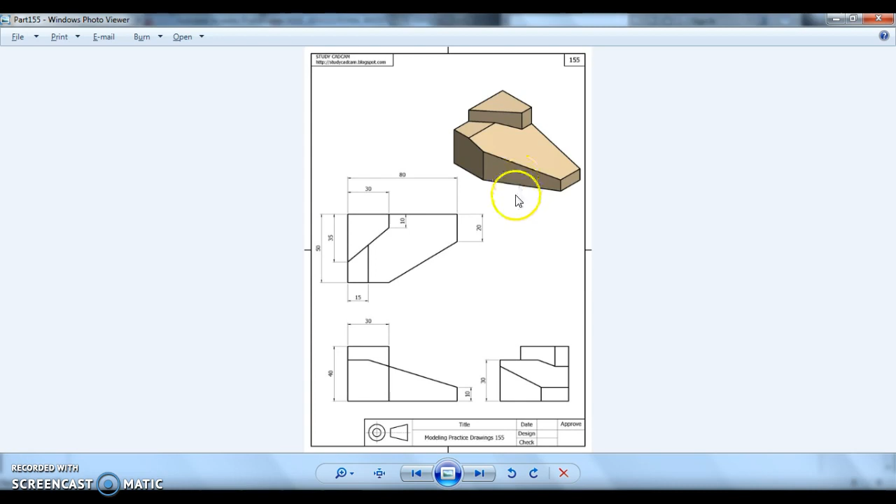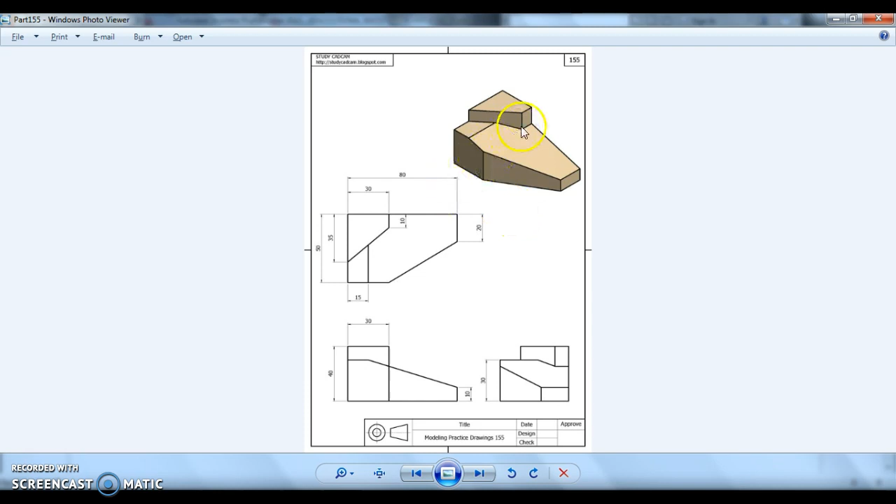Many ways to tackle this beast. What I'm seeing is this main base feature here in the front view. Looks like I can extrude that inward through a depth of 50, so I'm going to push that back. Then come on the top view and cut it right here, so we can cut this little triangle out. And then come back in the end and extrude this feature right on through with this shape.

So let's see, 1, 2, 3 steps, 3 features. Should be easy enough. Looking at the dimensions, we're in MMGS, so always remember to set your units first. Alright, let's get this thing going.

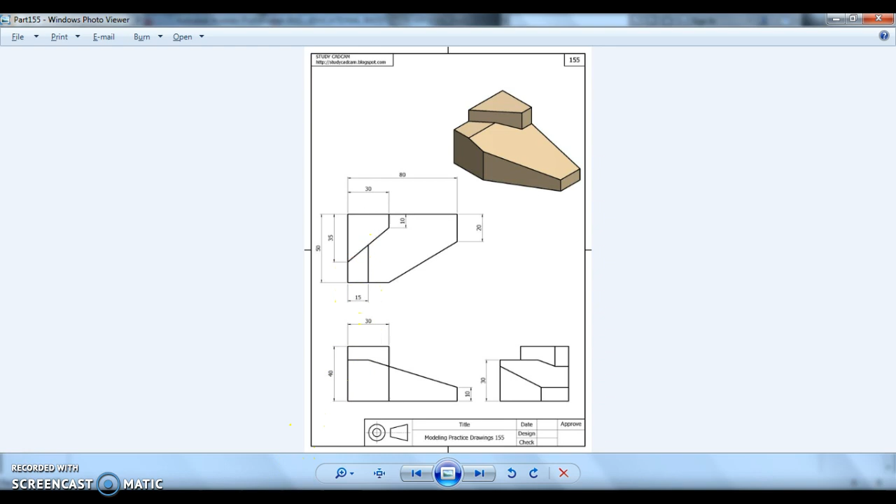So let's open up our CAD software using Inventor. You have all this crazy stuff if you have templates loaded in previous projects. If you have nothing, you probably just have an icon up here. So go to the icon, drop it down, new part today. Just starting with a basic part.

Simple sketching, one extrusion, 2 extrusions and a cut. So here we are. Alright, let's see if we can get this thing going here. I'm going to start with a sketch. No, start with our tools. That's right, always start with the tools.

Document settings and units. Wherever those units may be, I don't care what software you're using, find them and change them. Right now we're just going to change these to millimeters. In a true MMGS system, we would also change our mass to grams, but we're good for now.

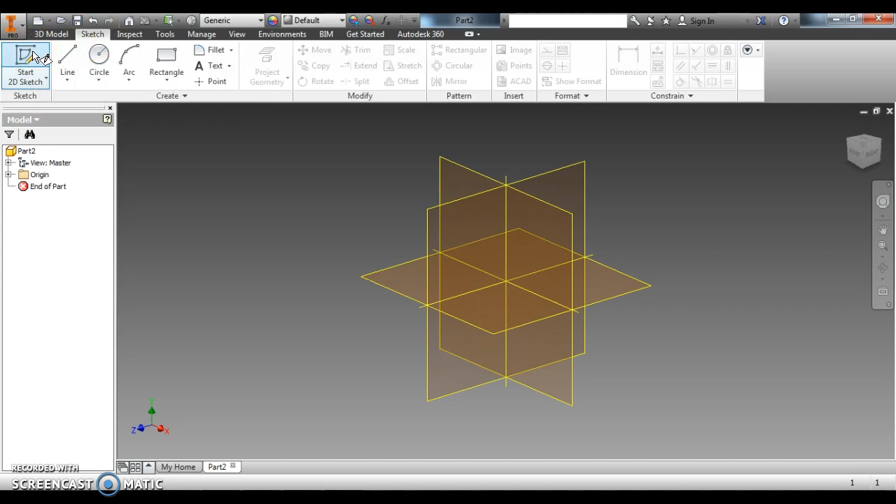Alright, sketch. 2D sketch. Let's just stay with our reference image here, and we'll start in that front plane.

Going back to our picture, you see we have this shape here. So there's a 10 there, and it's this 30. Beware, you see a 40 here in the front, but really that height is the 30.

So it's the 30, the 10, and then the length you find all the way up here in the top view, the 80. So we're going to go 30, 15, 10, 80. Alright, let's knock it out.

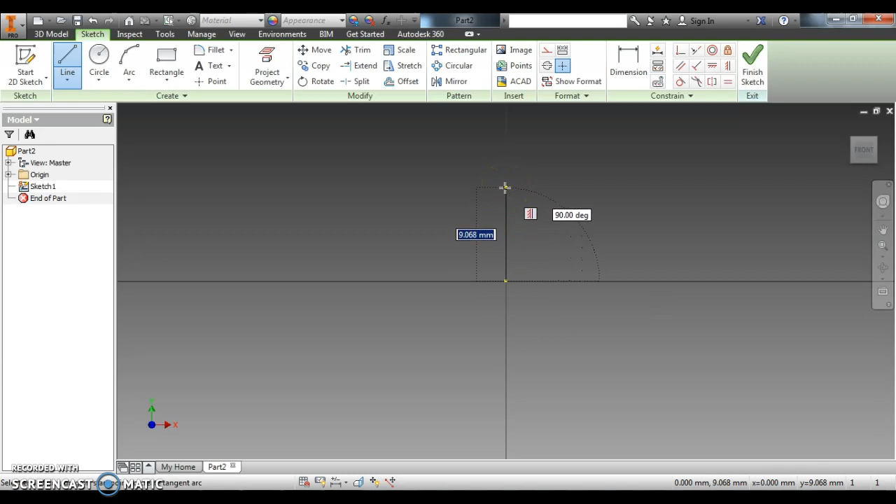Line. We'll start at the origin. Let's do our first little 30 here. We can type it in. Direct input, 30, enter. Use your mouse wheel to scroll on out.

I'm rolling it in. Use your mouse wheel. Push that bad boy down to pan. So get good at navigating. Come on, alright, let's rock this thing out.

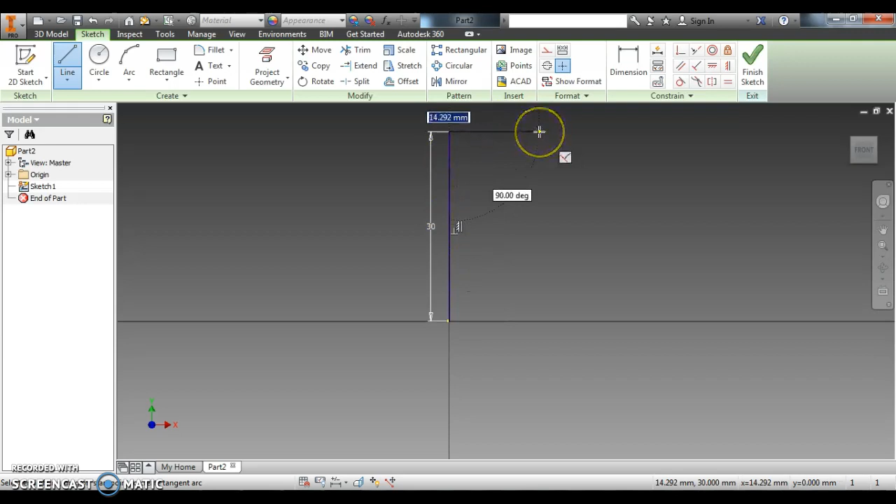That was 15. This came down at some type of angle. Make sure it does not hit the midpoint. We do not want that relationship right there. No, so bring it down.

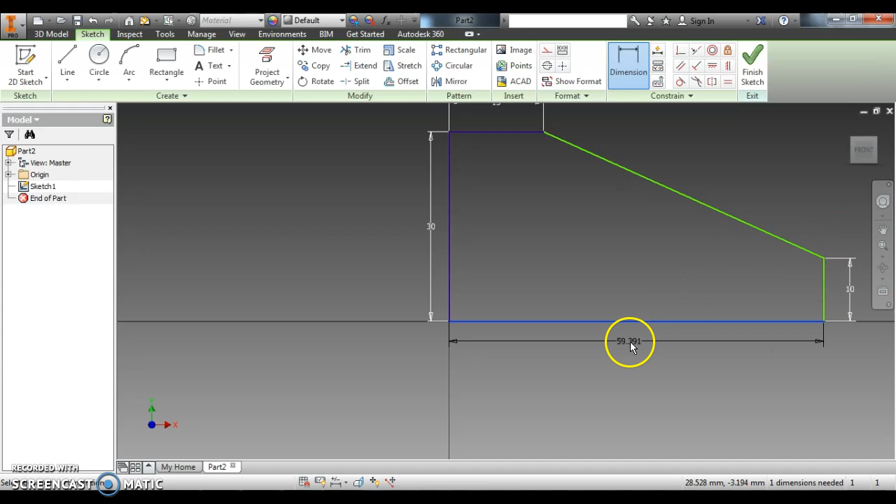Alright, straight, keep it vertical, and close it off. When you want that vertical, keep it vertical. When you want the parallel, keep it parallel. Make it do what you want it to do, man. It's the great thing about relationships and constraints. You can really lock in that design with the intent.

However, if you set up the wrong intent, it can make a mess. So there's our base. Alright, go back to your reference image. Get extruded to a depth of 50. Alright.

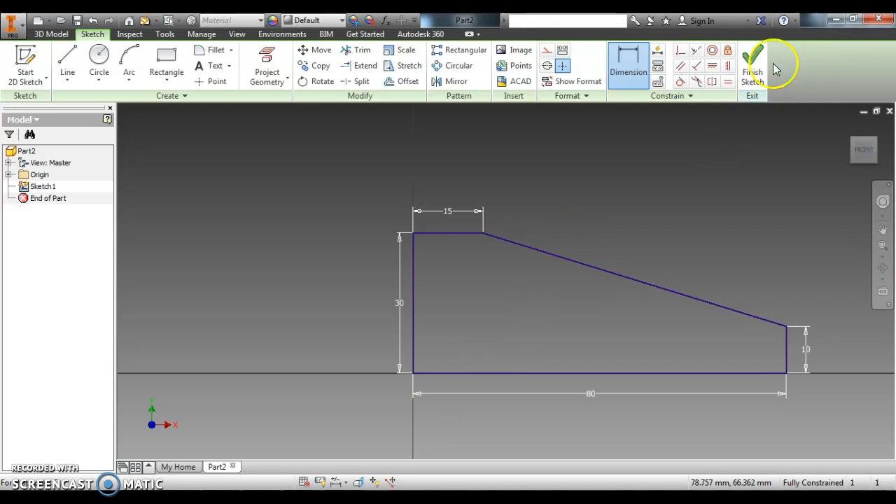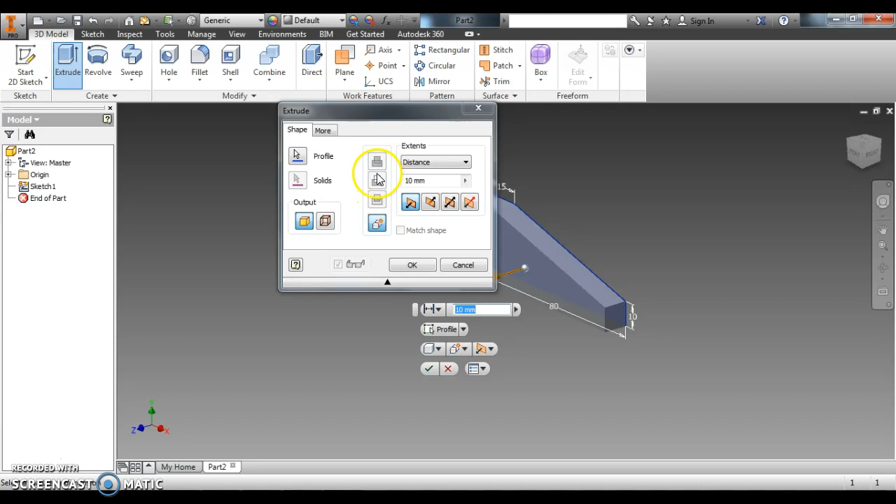So, finish sketch, and let's go to 3D model. Extrude. Right now, since we have nothing created, the only thing we can do is new solid. In the future, we can add, subtract, combine.

Well, type in 50 for our distance right here. This is which direction you want to go. You can go both ways. Yeah, symmetry is nice, get in the habit of that. That's great for the future. Symmetry, we like symmetry. Alright.

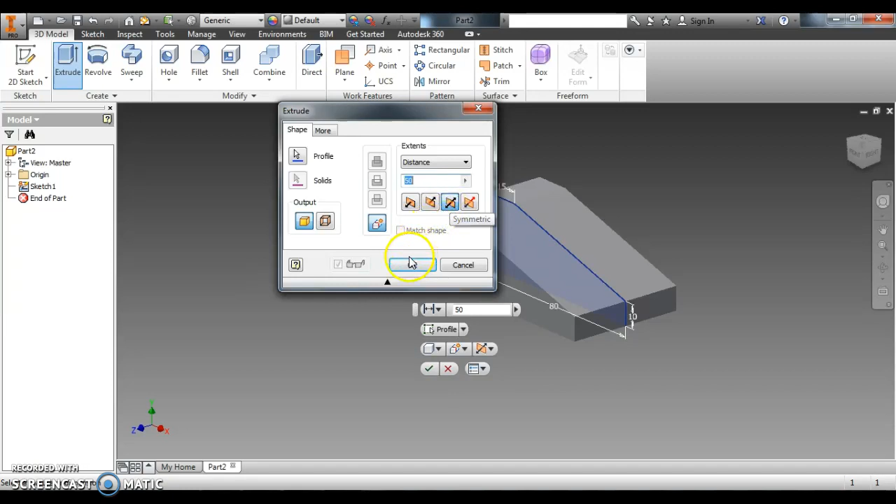Okay, there's your first part, or your base feature. Extrusion 1. Alright, let's cut that triangle out the top. So I'm going to go to this plane right here.

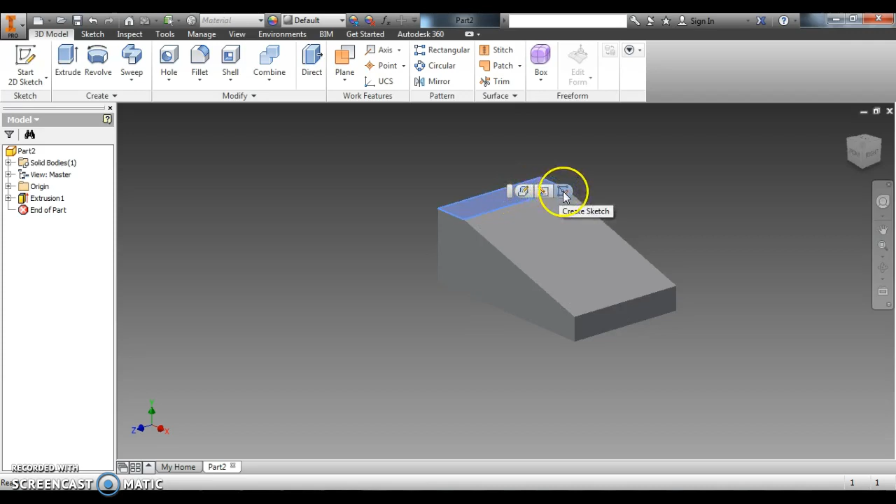And I am going to create a sketch. Or you can hop over here.

Alright, this drops us on a plane right there with that top surface. So we're going to sketch our triangle and cut it out.

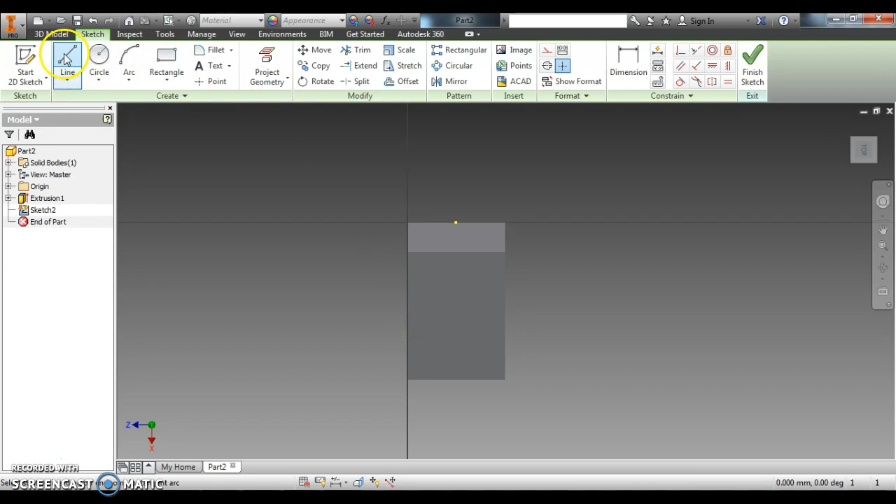So there we go. What we don't want is that. No, bring it off. We do not want to lock onto that midpoint. Let's get it here. Let's get it here. That is not what we want.

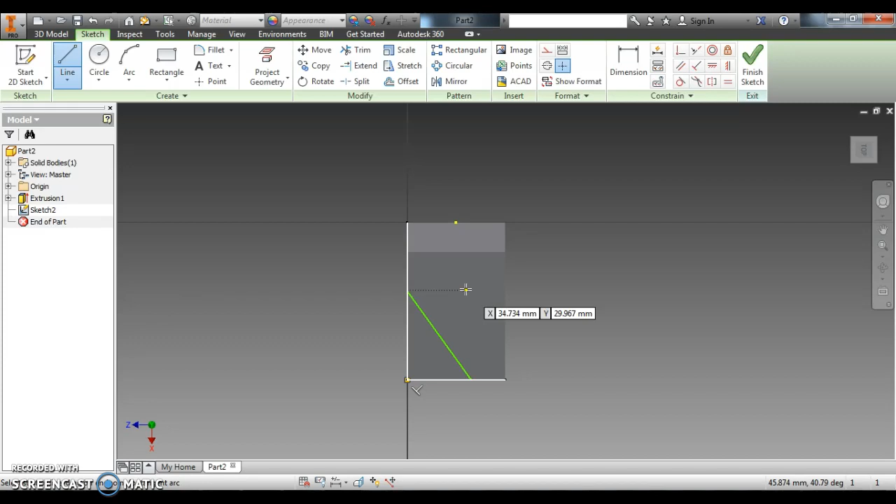It locks you on there with a relationship, and if that's the intent, okay. But if not, don't put it there, because then you're going to have to come back and delete it, and it causes all types of mess later.

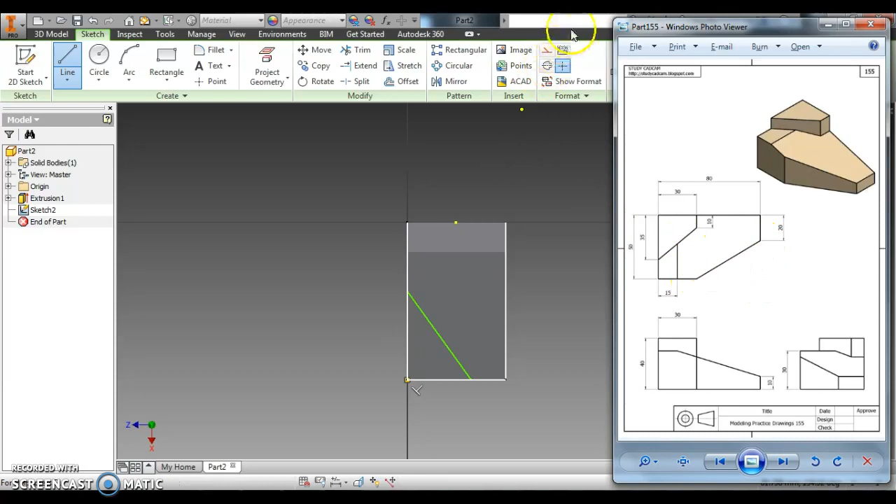Alright, so go back into our CAD. And we could mark the length, we could do a little subtraction, but let's just get in the habit of inputting the dimensions given.

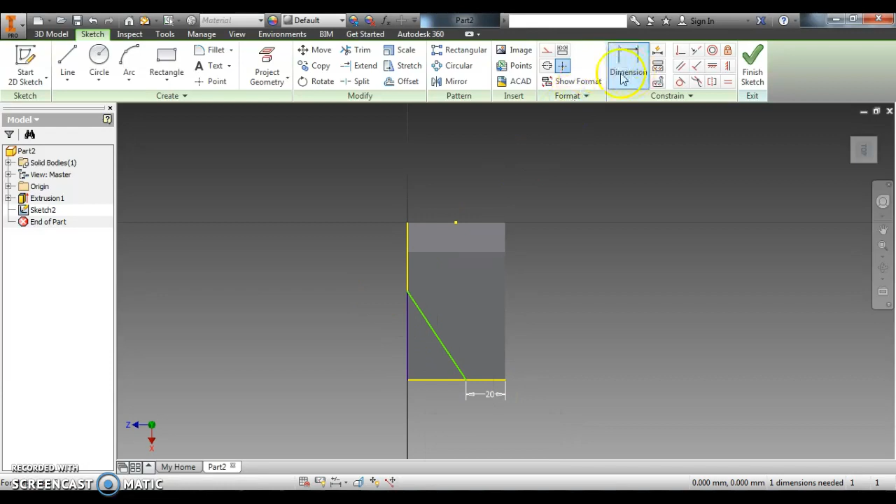They gave us 20, and I'm just using our dimension tool here from point to point. 30. Real simple tool to use. So you just click your dimension tool. You can click a line and place a dimension. You can click an edge. You can click circles, whatever it may be.

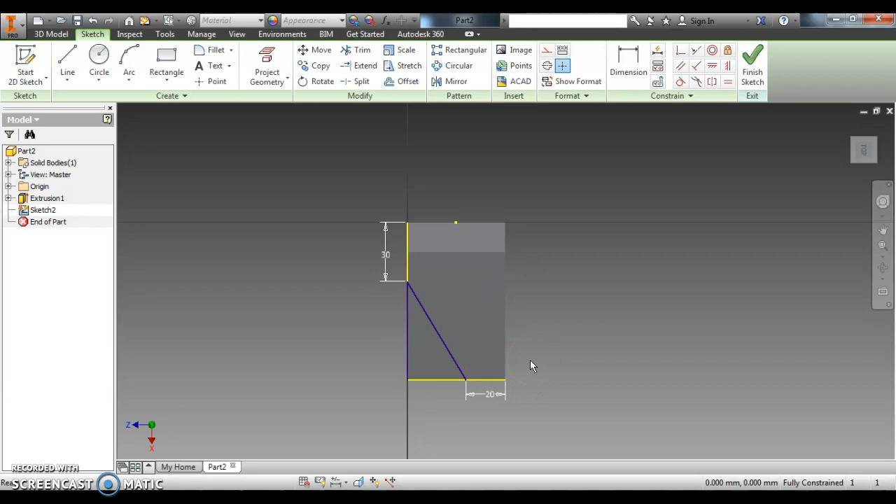Alright, I think this sketch is good. Hit finish sketch. There it is up there. So we're going to use, I'm not sure why it has a little extra piece there, but let's go to extrude.

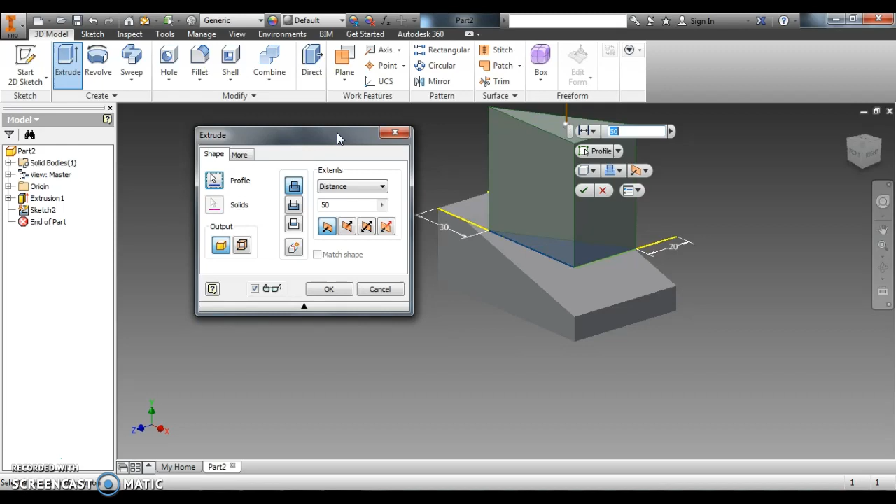You'll see that it's adding material. We want to subtract material. And there it goes, cutting right through it. Our piece is only 40 high, so we know that this piece of 50 is going right through it. You're going to see it there.

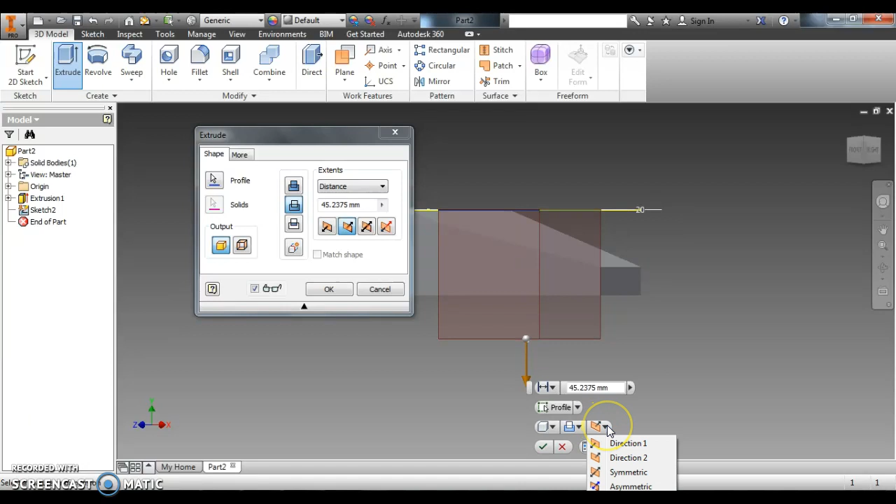You can also use these handles if you like and drag things up. In the future, you can set relationships to make it always go through all. Oh, where's it at? I don't know. Let's not get too wild right now. There we go. Alright, there's that cut.

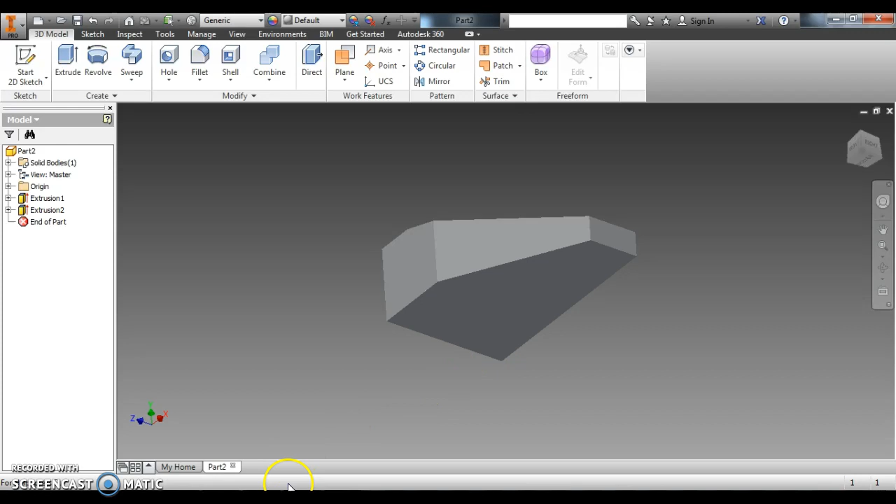Let's sketch that last little shape and extrude it on up. So I'm going to sketch it on the bottom. Why? I don't know, that's just because that's the way my mind works. I see the height coming up from the bottom there. So I'll bring it all the way on up through. That way I know it gets through all of this sloped area here.

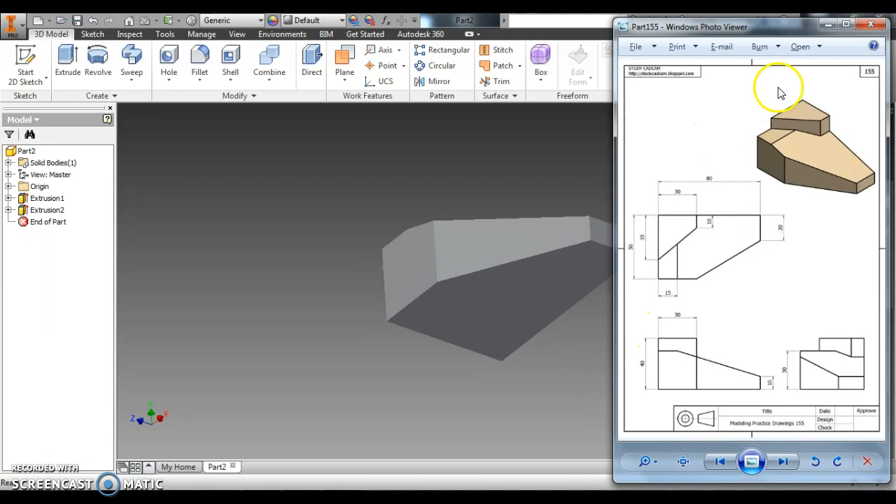And I guess I could come up to a plane at 50 or go both ways, but that's just too much. Let's just get down here and sketch. And what I saw was the shape from the top. That's what I was seeing. There we go.

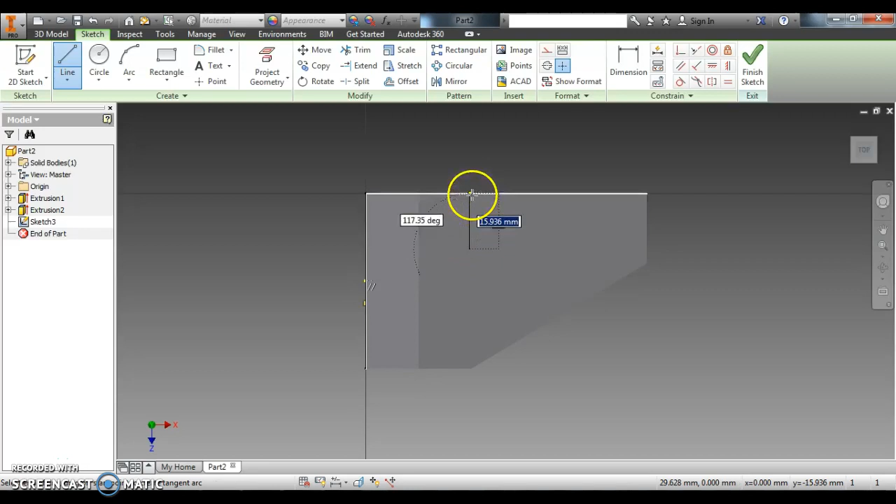Let's do this. Look at that, see? So we just come in. Alright, and we're on this top surface here. So we're looking through the top. Oh, and we're on the bottom. That's what we're on, we're on the bottom. So 1 line, 2 lines, 3 lines. There it is, boom, right there.

And the dimensions that we have are 35, 30, and 10. So there's that 35 in there. Oop, see, now I can't see my lines. Dimension, there's a 35, come on. Dimension, there's a, come on. Dimension. There's a 35 in there. There's a 10 in there. And there was a 30.

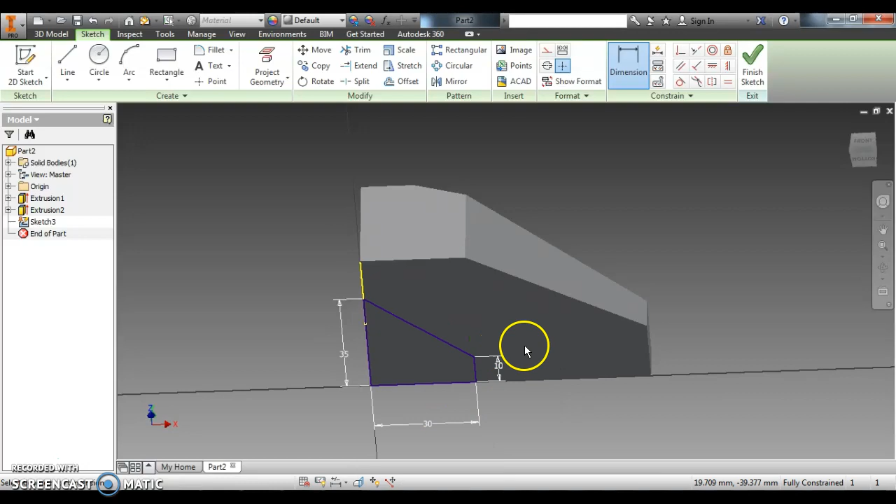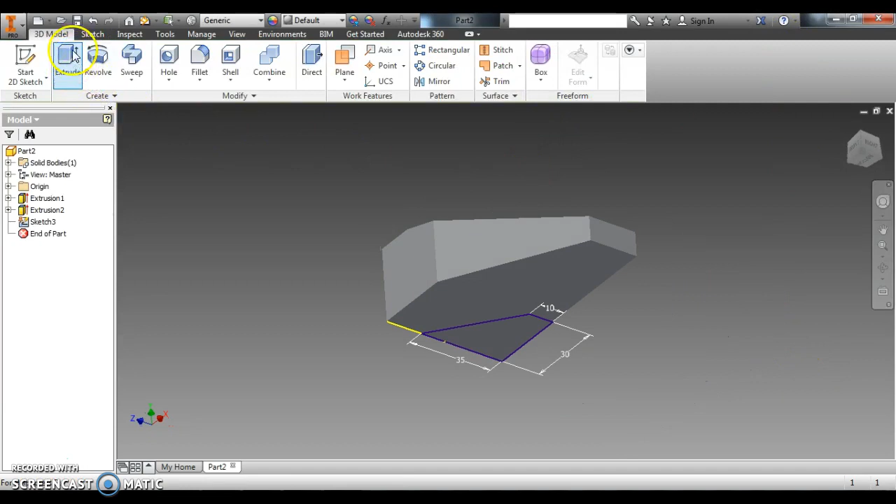If I spin this bad boy back around, 35, 30, 10, and it comes up to 40. So there it is. Let's finish this sketch. Let's extrude her on up to 40.

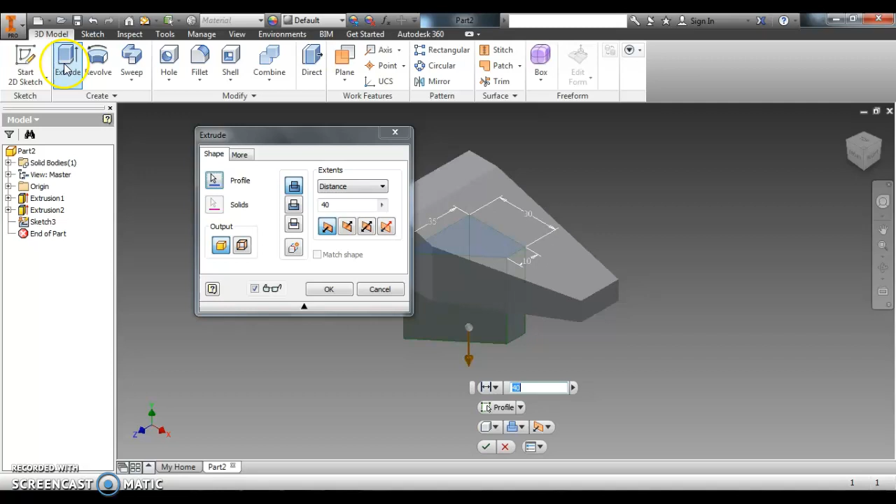Bring it around. Whoop. Flip it. Oh boy, control Z. Let's do that again. Sketch 3, extrude. Flip it. And for some reason when you flip it, it turns it to cut. Back to join. Alright, there you go.